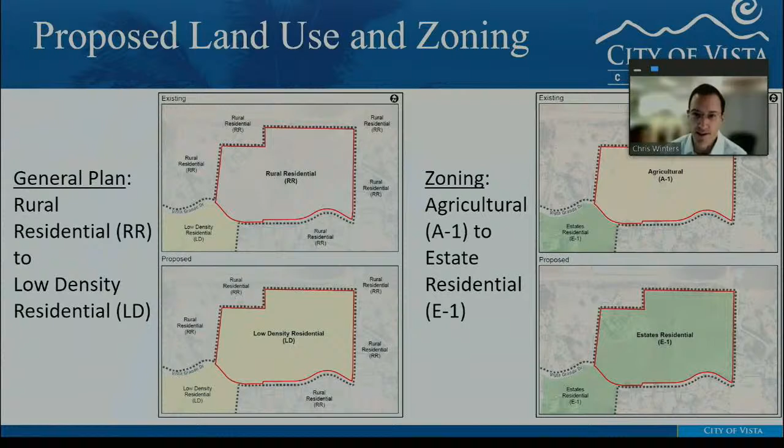Next slide, please. This slide shows the proposed land use and zoning. On the left-hand side is the existing general plan of rural residential, proposed for a change to low-density residential. On the right-hand side, we have the existing zoning designation of A1, proposed to be changed to E1, estate residential. Next slide.

Project history. The project site consists of 17 acres. It was annexed into the city in 2017 with a zone change to A1 zone for 14 lots, minimum 1 acre in size. On January 12, 2021, the City Council discussed a preliminary proposal from the applicant to allow for an increase in density to 2 dwelling units an acre for a 28 lot subdivision.

On December 7th, 2021, Planning Commission held a public hearing for the request to amend the general plan land use designation from rural residential to low density residential, and to change the zoning from A1 to E1 estate zone for the 28 lot subdivision with minimum half acre lots.

Items discussed by the commission at that time included lot size compatibility with nearby properties, the lack of on-street parking stalls, what the height of the new homes would be, whether 1 story or 2 story, gating of the road connection to Vista Grande Terrace, and landscaping and maintenance. The item was continued to an undetermined date. Next slide.

Project details as revised. Just a quick summary: based on feedback from the Planning Commission, the following changes have been made to the project by the applicant. The project has been decreased from 28 to 25 residential lots. Lots 6 through 11 were enlarged to 3/4 of an acre.

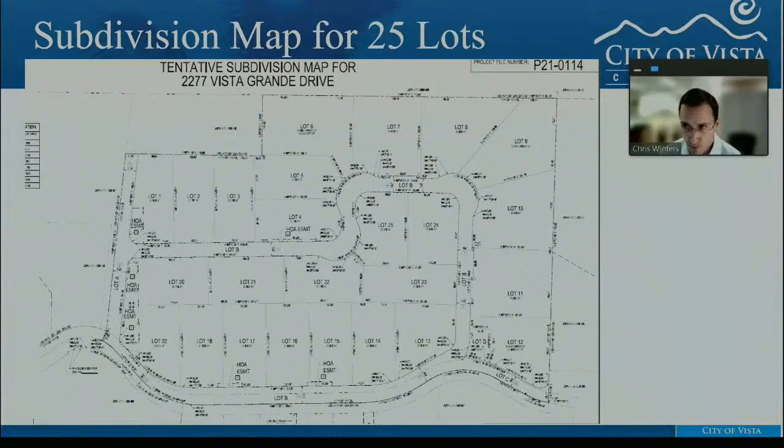This is the tentative subdivision map as revised, showing the larger lots on the north and east sides of the project boundary. It's a little bit hard to see on this slide, but the applicant has one that will highlight the on-street, street side parking spaces that are adjacent to a few of the lots distributed throughout the site. Next slide, please.

We do have revised conditions of approval that were sent to the planning commissioners by email, and we were just working on this today, so you might not have seen it. But to go over that, we've revised conditions for clarification purposes.

The first one, under the land development engineering conditions, states that the road connection from the eastern end of Vista Grande Drive to Vista Grande Terrace shall be gated to provide for required secondary emergency access only, and a corresponding note shall be shown on the final map.

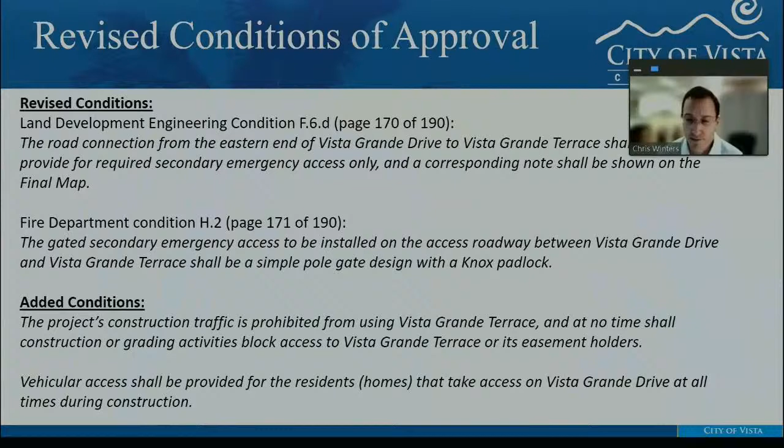Under the fire department conditions, one condition was revised to state the gated secondary emergency access to be installed on the access roadway between Vista Grande Drive and Vista Grande Terrace shall be a simple pole gate design with a Knox padlock. Added conditions include: the project's construction traffic is prohibited from using Vista Grande Terrace, and at no time shall construction or grading activities block access to Vista Grande Terrace or its easement holders. Also, vehicular access shall be provided for the residents that take access on Vista Grande Drive at all times during construction.

Under environmental review, a mitigated negative declaration was prepared. That was circulated for public review from October 2nd through November 1, 2021. The amended project does not include any new potentially significant environmental impacts, or increase any previously analyzed potentially significant environmental impacts that would require further mitigation than already required by the mitigation monitoring and reporting program. Pursuant to the California Code of Regulations, recirculation of the negative declaration is not required.

Staff's recommendation is for adoption of a resolution recommending City Council approval of the MND and mitigation monitoring and reporting program for the Vista Grande subdivision project, and to adopt a resolution recommending City Council approval of the general plan amendment, zone change, and tentative subdivision map for the 25-lot subdivision located at 2277 Vista Grande Drive. That concludes staff's presentation. I'm available to answer any questions, and the applicant also has a presentation that will touch on more detailed responses to the commission's previous comments.

Thank you. Chairman Ressler, would you like for the applicant to go into his presentation this time, or do you want to ask questions of Chris? I think we'll hear from the applicant first and then ask questions of both of them.

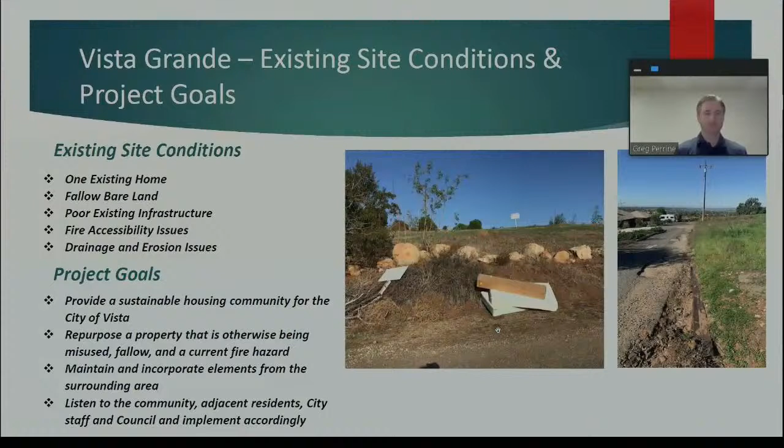So when we met on December 7th, we had a great dialogue with not only the commissioners, but also some of the surrounding residents who came up and spoke at the public forum. We identified a few key areas that we really wanted to focus on, go back, retool, and reassess to see if it's something we could accommodate with our development. I'll go over the three that we have here.

A couple of the other ones we felt were equally important were on the list: the existing roadway on Vista Grande Drive. I think Commissioner Rossler had mentioned why we didn't move forward with that road being public. When we started the design and further confirmed with the city after our meeting on December 7th, the city has no intent nor ability to own and maintain that road. We spoke to them very early in that process, and they had a preference that we make it private so it would ultimately be owned and maintained by the HOA. That's how we ultimately continued to pursue that option.

The second one, not really noted here, is something Commissioner Aguilera had brought up regarding SB9, the new legislation that allows you to separate lots and maybe add additional lots. Since our meeting on December 7th, we went back, did our own research, and spoke with some individuals. We were able to define with a bit more clarity what SB9 is for and how it may or may not apply to our development. Most notably, we have a letter from Senator Toni Atkins from August 2021 clarifying that properties or new developments with an HOA are exempt, and they override the rules and regulations of SB9. So we have the ability within our CC&Rs to prohibit subdividing those particular lots, and we would likely do that to ensure the integrity and the elements we want to protect in this area.

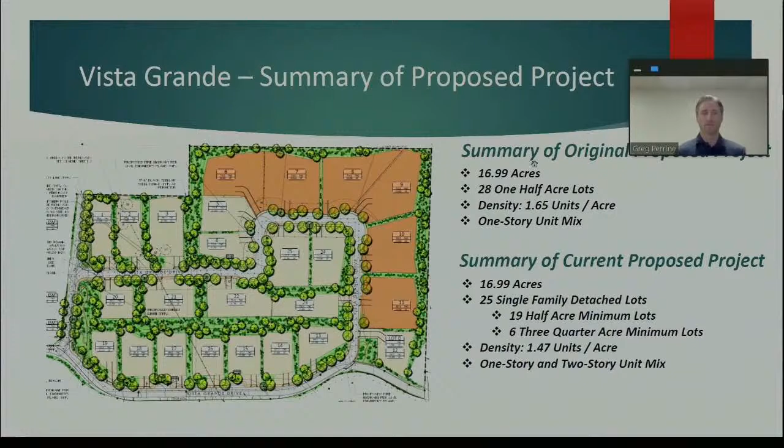Chris touched on this a bit, so for further clarity—and apologies for some redundancy—per the city code, based on what we're proposing for the 25 single-family detached lots, we have an obligation to provide 50 enclosed parking stalls and another 62.5 open guest parking spaces, for a total of about 112.

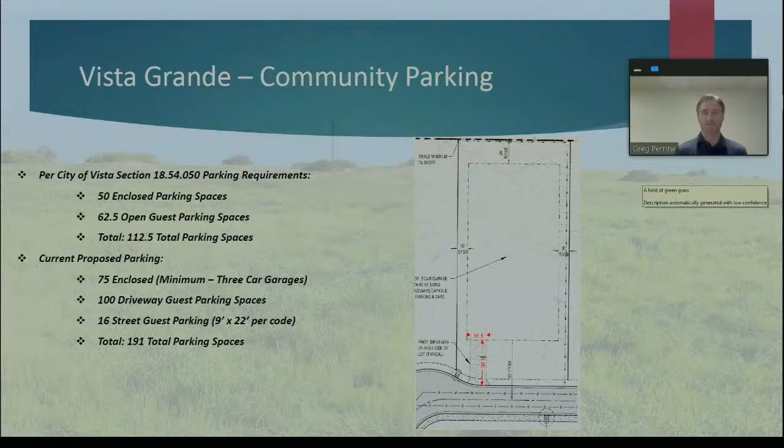Then with the driveway, allowing 4 spaces per lot, that gets us to another 100. We went through this configuration after listening to the commissioners at the December 7th meeting, who said they wanted to see additional parking on the street. We took that to heart, went through the city standards, and worked with our consultant team to put together additional street parking throughout the development to better accommodate guests as they arrive.

This illustration continues from the last slide and shows the areas where we've added additional parking. You can see the highlighted yellow areas—those are spots we carved out, call them pop-outs, for guest parking spots. We have 16 throughout the development. Right now they're shown with a pretty rough edge; as we get into final engineering, we'll refine the roundabout shape to get in and out of these stalls for better functionality and ingress/egress. Nevertheless, this illustration shows we took your comments on parking to heart, and rather than isolating it to one area, we did our best to allocate it across the entire development.

So in conjunction with the enclosed parking with the 3-car garage minimums, the driveway parking, and the on-site guest street parking, we're at a total of about 191 parking spaces, which is well in excess of the required 112.5. We feel that with this new parking reconfiguration, specifically the street parking, we're adequately parked, and in the appropriate places.

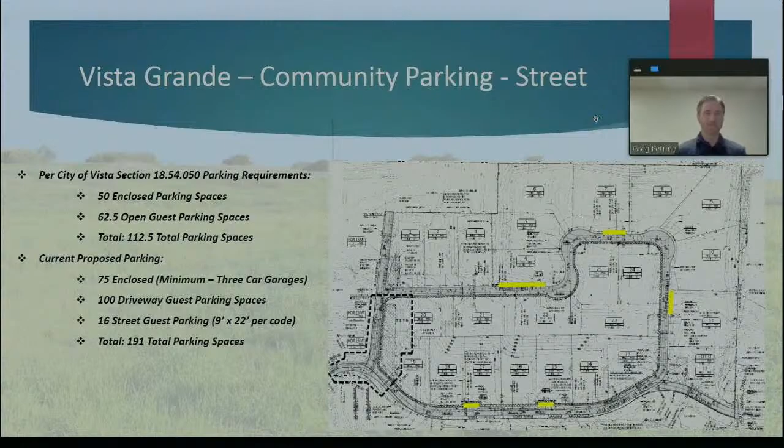The other element we discussed is privacy along the eastern property line. What we've done here, shown in the exhibit to the right, is an illustration of what we tried to accomplish with those lots. For context, the lot at the upper right is the northeastmost lot, lot number 9. For illustrative purposes, we dropped in a general footprint of what the house might be, and set the context based on the code requirements for what we're proposing—a 50-foot setback from centerline, a 10-foot side yard setback, and a 20-foot rear yard setback.

So what I wanted to highlight and illustrate here, it's kind of hard to see on the actual screen, but you can see the orange box there on lot 9. That shows the minimum setback of 50 feet from the center line. We wanted to show what that distance looked like from that point to our property line along the eastern and northern property line.

For that given lot, we did a couple of measurements. The first one is upwards of 190 feet. So if we were to build a home footprint, currently shown for illustrative purposes as 60 by 60, a 3,600 square foot footprint, there's anywhere from 120 to 190 feet from the back of that house to the edge of the property line.

Our goal here is to show that privacy is adhered to and respected. I think there's a significant distance from the rear of the house to those property lines. Again, these are just for illustrative purposes as we move forward with final plotting and final engineering. It's something we'll go back and refine. But these are significantly large lots.

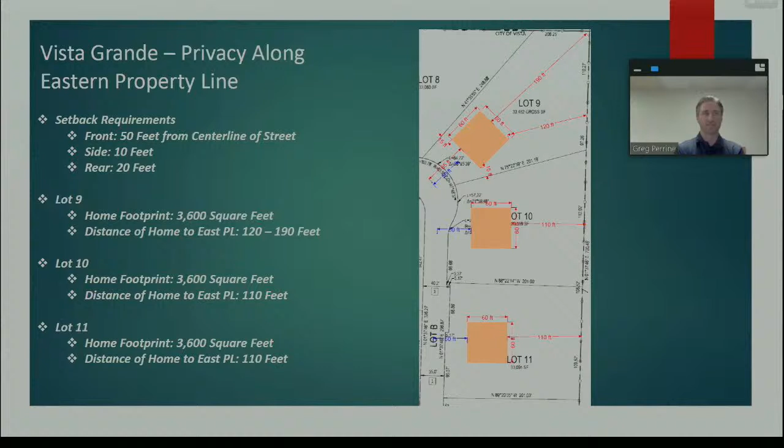Some of these lots have depths of 220 to 230 feet. And as you make your way south from lot 9, with lot 10 and lot 11, you'll still see that consistency of over 100 feet distant from the back of our house to the east property line. So privacy, we understood it, we respected it. And with these larger lots, I think it really adheres to the genesis of what we were trying to accomplish.

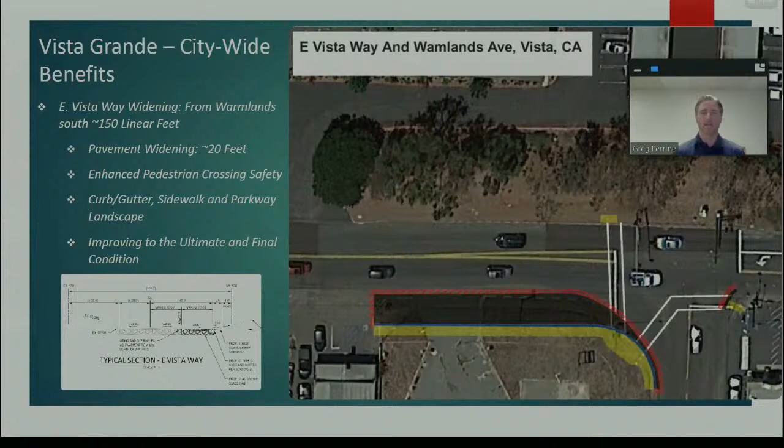In dealing with city council members, it was very important for them to at least provide some continuity from a pedestrian standpoint, and we felt an obligation to do what we could. This improvement is permanent. Once it's built, it's not an interim condition - we're building it to its ultimate right of way, something that will stay there in longevity and in perpetuity. We're very proud of this commitment. Again, this wasn't warranted by our traffic study, but we felt it was a way to be balanced and provide for the overall community, so it's something we're willing to commit the project to doing.

Next slide, please. To summarize, we're currently proposing a 25 large-lot residential community. After our meeting on December 7th, we went back and put pen to paper, working with our consultant team and city staff to address the comments that were provided - mainly the transitional layout from the lot standpoint, the parking requirement, and some of the privacy concerns.

So we feel what we've provided is a balanced project that is consistent with some of the feedback we received on December 7th. We also feel very proud of the enhanced adjacent and regional infrastructure we had talked about before. The project is going to meet all the different compliance from a sustainable standpoint. The home materials will be the highest quality, and all the homes will be fire sprinkled. The enhanced infrastructure for water purposes for firefighting will be greatly enhanced, as we're going to put in a loop water system way further north than where the current water exists today. We really think it opens up that whole region, not only for us, but for some of our neighbors to the east, for better fire protection and fire serving.

Next slide, please. So again, I want to thank you guys very much for the time and the opportunity to come and represent. I hope we've addressed some of the concerns we talked about on December 7th. I look forward to your comments and feedback, and again, thank you very much for your time and consideration.

Okay, thank you, Greg. Commissioners will open it up now to questions for staff or the applicant. Commissioner Grimm, do you have any questions? I don't have any questions at this time. All right, Commissioner Aguilar?

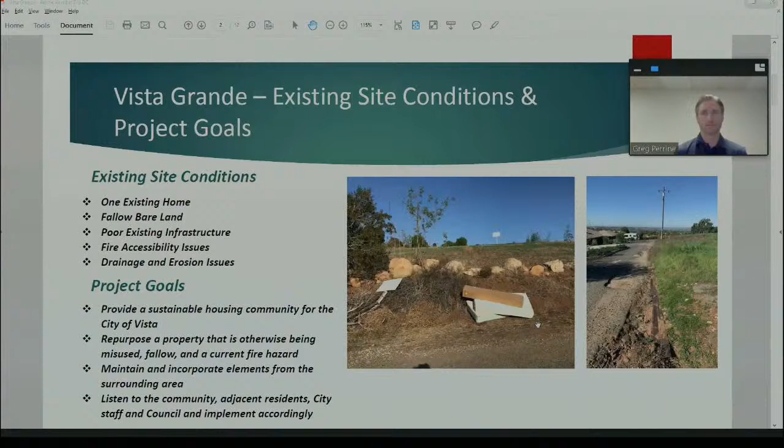As far as the plantings you show in your landscape plan, what are we looking at? What size trees are you bringing in? It's still to be determined at a certain point. We do have a mix of 5 gallon, 15 gallon, and 24-inch box trees on the street. It depends on the location, but most of the slopes will have significant 15-gallon trees, and mainly on the street parking or along the street we'll have 24-inch box trees.

How about on the east and northeast area, adjacent to the neighbors? Yes, sure. No, absolutely, that will be the slope, correct. I think it's going to be a palette that'll be further defined as we get to final engineering, but again we are going to be putting in the appropriate plant palette with appropriate sizes.

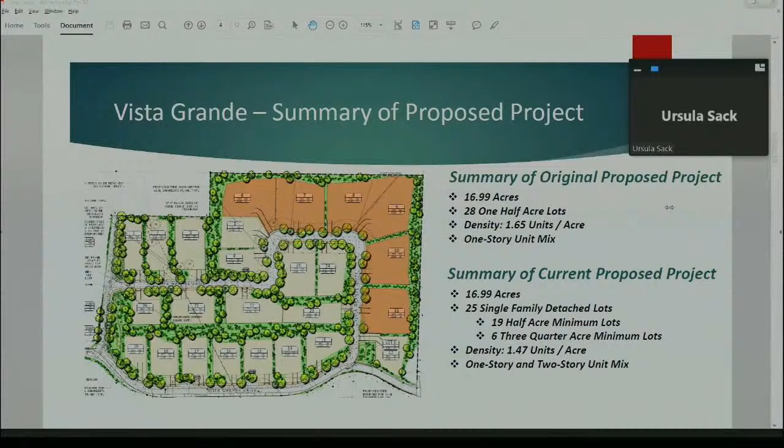We ask that you thoroughly discuss the general plan amendment at this meeting. We got it, thank you.

Mr. Winters, going back to the daylight sewage, do we have an answer to that question? Thank you, Chairman Ressler. I'm not sure if the applicant's engineer is available to speak, but I'll go ahead and read from a response provided to them that was included in the project's responses to comments in the MND. The project engineer, PLSA, confirmed that the grading plans considered the existing leach lines that occur along the eastern boundary of the project site. The cut slope along the tract boundary accounts for the required codes and regulations for a 5-to-1 setback for cut grading adjacent to an existing leach line system from an adjacent property owner. The project has been designed to comply with the required setbacks for dispersal fields.

Very good, thank you. Okay, Ms. Chow, who's next? I don't see additional hands raised, so I would ask if you are here to speak on the Vista Grande project, please raise your hand so I can recognize you. Alisa Willis-Davis, you already spoke, so we are only allowing new speakers at this time, please.

Hayden Davis, go ahead, hold on. Go ahead Davis, if you can unmute yourself. Go ahead. Hayden, go ahead, you can go ahead and speak. I believe you are unmuted right now. Yeah, for some reason we're not hearing the audio here, Chairman Ressler. There might be an issue at their end. Oh, here we go, go ahead Davis. Hayden Davis. Nope, yeah, there seems to be some difficulty. It's unmuted, but we're not able to hear the commenter at this time.

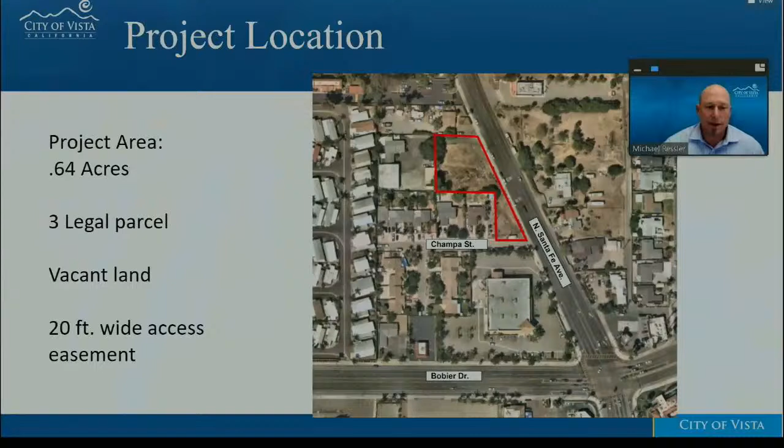Ressler explained the project before the commission is a site development plan for the proposed North Santa Fe Plaza apartment project, application number P19-0404. The subject site is located on the west side of North Santa Fe Avenue, north of Bobier Drive, covering 0.64 acres across 3 legal parcels, currently vacant land. The northern portion maintains a 20-foot wide access easement providing access from North Santa Fe to the neighboring property to the west.

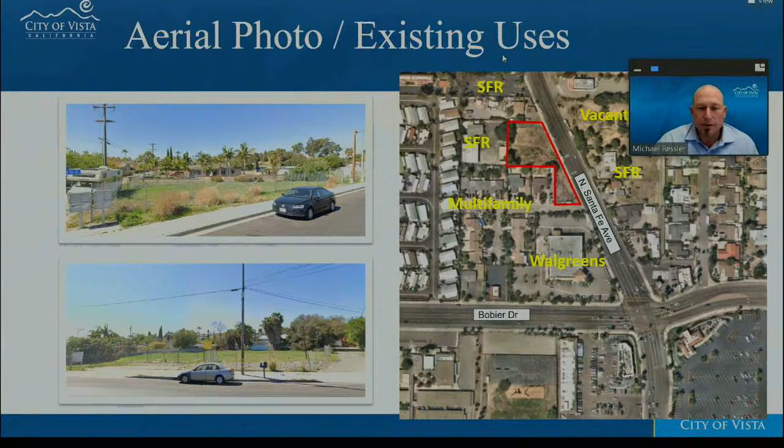Here's an aerial photograph of the site. Surrounding land uses include a single-family home to the north, single-family and multifamily residential development to the west, Walgreens to the south, and single-family homes and vacant land to the east across North Santa Fe Avenue.

The general plan land use designation for the site is mixed use MU, with the corresponding zoning of mixed use MU 40 with the North Santa Fe overlay, which allows for mixed use and multifamily residential development with a maximum density of 40 dwelling units per acre.

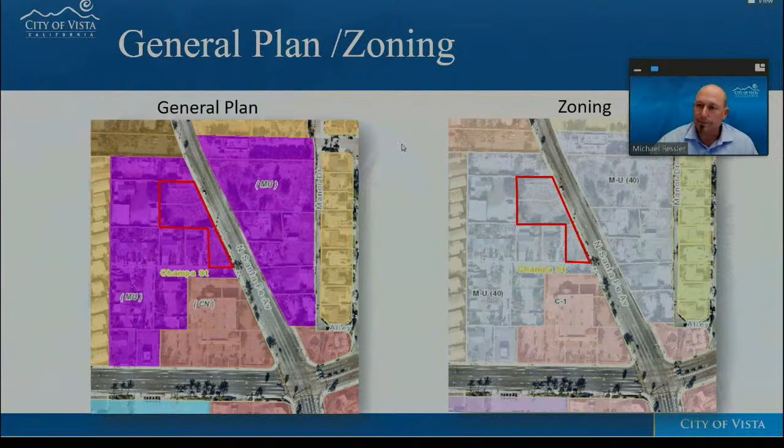The North Santa Fe Plaza apartment project includes a request for a site development plan to develop 21 apartment units on 0.64 acres, which equates to 33 dwelling units per acre. The project also includes a 746 square foot single-story coffee shop. Site improvements include open space, parking, drainage improvements, wet and dry utilities, as well as other infrastructure improvements.

Recreation amenities within the proposed development would include a gym, seating areas, playground, and turf. This project does include 2 very low income affordable units. In return, the project would utilize a state parking requirement for the number of on-site parking spaces required and qualify for 1 development concession per the state density bonus law.

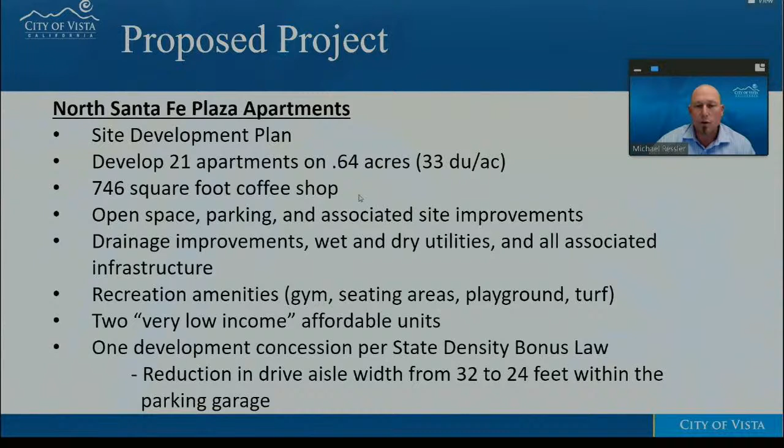The applicant is requesting a reduction in the drive aisle width from 32 feet to 24 feet within the proposed parking garage.

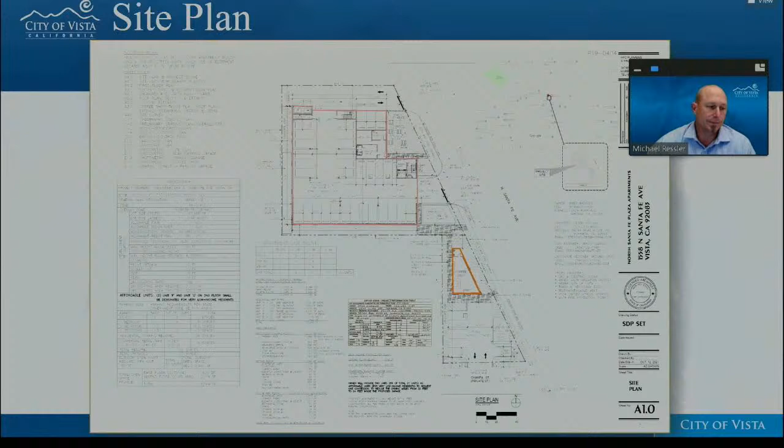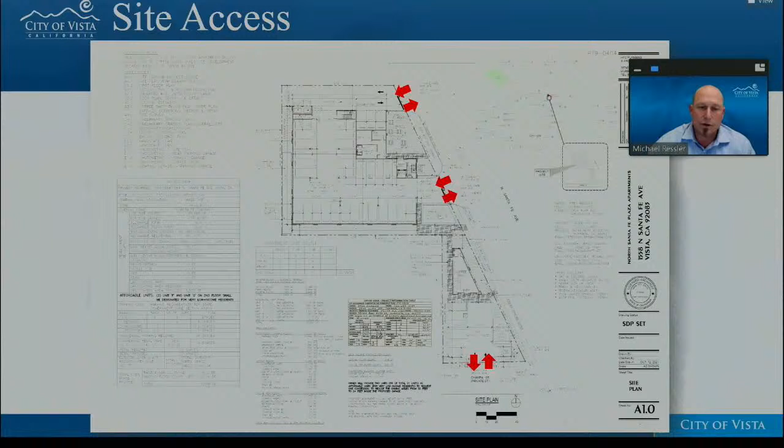The submitted site plan depicts a 4-story apartment building on the northern portion of the site, as well as a 746 square foot 1-story coffee shop on the southern portion of the site. Access to the site would be provided by 2 24-foot wide driveways along North Santa Fe Avenue, as well as 1 24-foot driveway along Champa Street.

In regards to parking, the Vista Development Code requires 5 spaces per 1,000 square feet of gross floor area for the coffee shop. The state density bonus law requires 1 parking space for 1-bedroom units and 1.5 parking spaces for 2 and 3-bedroom units. Based on the proposed count, the project would require a total of 32 parking spaces, and the submitted site plan indicates a total of 37 parking spaces would be provided.

As I mentioned before, the applicant is requesting a concession to reduce the drive aisle width within the parking garage from 32 feet to 24 feet.

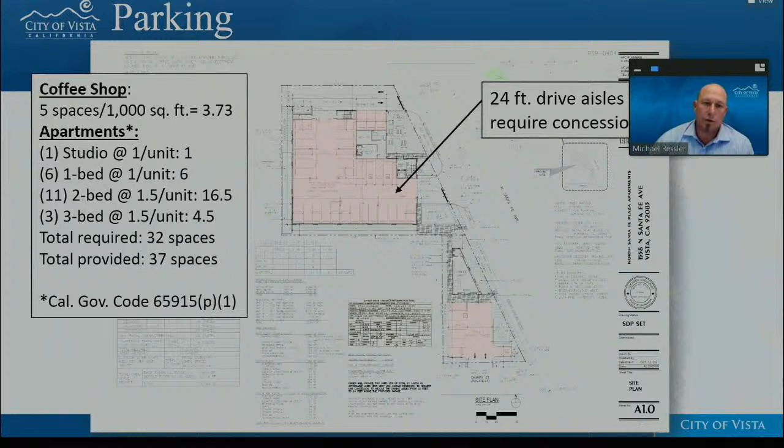In regards to landscaping, the site has been designed to dedicate 23% of the site to landscaping, which exceeds the code requirement of 10%. The landscape plan proposes the use of native and non-native plant materials.

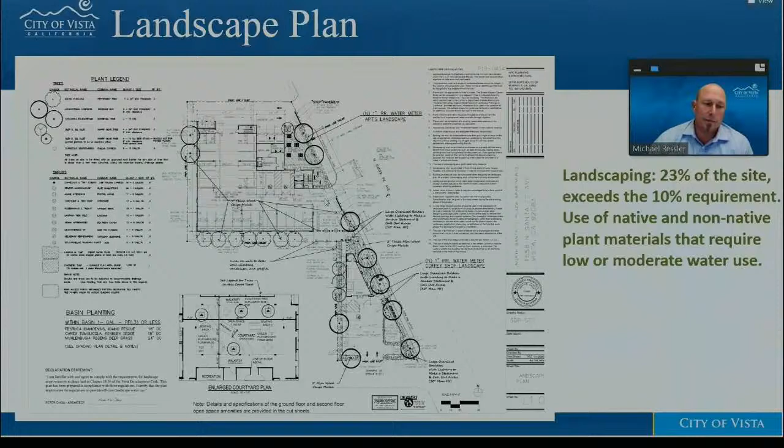Site amenities include a turf and seating area on the ground floor. And on the second story, it would feature a courtyard featuring a seating area, play equipment, as well as a gym.

The proposed apartment building would be 4 stories, maximum height of 54 foot 4 inches. The architectural design of the building reflects a modern Mediterranean architectural style. The building would feature hip, gable, and slope roofs and stucco exteriors. The building elevations are enhanced with features that include arch recess elements, stone veneer awnings, as well as metal railings. When completed, the apartment building would maintain a tan and white color scheme.

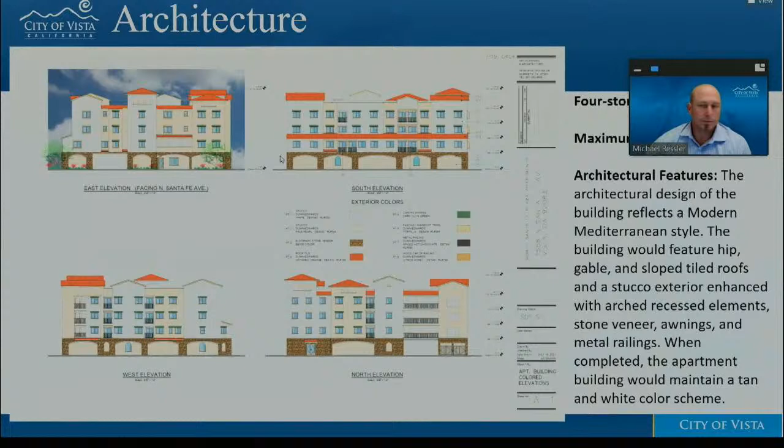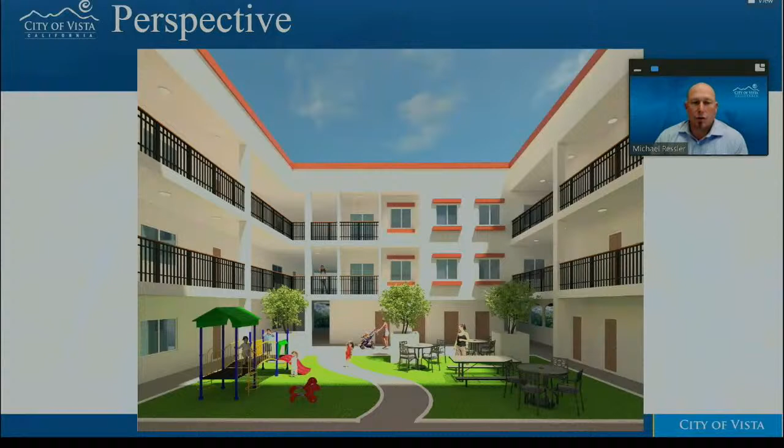The proposed 746 square foot 1-story coffee shop has been designed to maintain a service counter, display shelves, as well as restroom facilities. The exterior of the building has been designed to complement the proposed apartment building with similar finishes and color scheme.

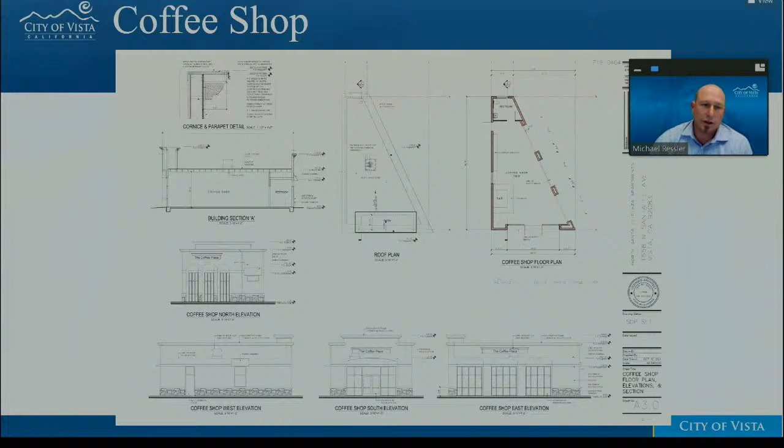The general plan land use designation for the site is mixed use with a maximum density of 40 dwelling units per acre. The proposed project includes 21 units on 0.64 acres, which equates to 33 dwelling units per acre. In regards to the MU 40 North Santa Fe overlay development standards, the project has been designed to comply with those standards. In regards to building height, the maximum height within that zone is 60 feet. The proposed project would reach a maximum height of 54 foot 4 inches.

In regards to parking, the required parking would be 32 parking spaces utilizing the state density bonus law parking requirements. The site plan has been designed to provide a total of 37 parking spaces. In regards to open space, code requires 2,940 square feet. The plan indicates 3,799 square feet would be provided. And in regards to landscaping, 10% of the lot is required to be landscaped pursuant to the zoning ordinance. The submitted site plan indicates 23% would be provided.

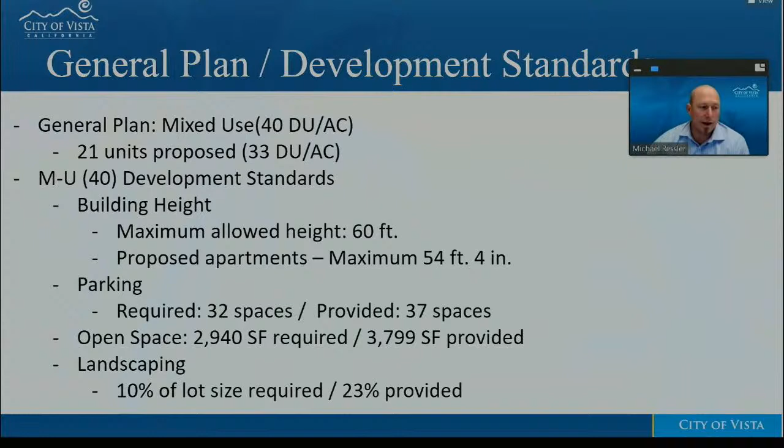Patsy, it doesn't look as though the whole entire slide's coming up. Oh, there we go. There you go. There's an animation, Michael.

First, building massing and architectural continuity. The applicant has revised the proposed apartment building elevations to reflect a more cohesive architectural style. In order to confirm the architectural continuity, staff retained the services of NW Steel Group, a reputable San Diego architectural firm, to perform a peer review of the revised design. At the conclusion of that review, NW Steel Group confirmed that the plans were accurate and represent a consistent architectural theme.

Another concern of the Planning Commission was the unorthodox exterior color scheme. Since the previous design, the applicant has revised the color palette of the proposed building to reflect a more neutral color theme featuring tan and white colors, enhanced with a burnt orange cement tile roof and green canvas awnings.

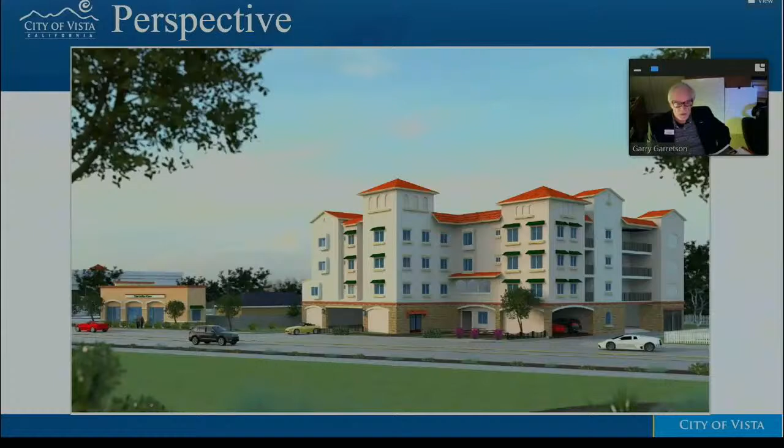Yeah, actually, the tower in the back—explain that to me. Yeah, those are just recessions on that wall in order to provide some type of an elevation break. So what that does is just break up the massing of that tower and provides a little bit of a relief along that elevation.

So it's not really a window, just to break up the surface there. That's correct, they're just recessed panels or archway. Yes, okay, that's what I thought. I wanted to confirm, thank you.

All right, Commissioner Hastings, questions of staff or the applicant? No questions. This has come a long way since the last time we saw it, and I think it looks a lot better, so I'm happy for that. I also like the layouts of the apartments inside. I know we don't necessarily look at that, but I like them. So that's it for me.

Okay, Commissioner Looney. Great improvements, Tony did—it looks like a different project. So you're to be commended on that. Two questions.

One's for staff, one's for the applicant. Michael, would both buildings need to be constructed, or could they build the apartments and then build the coffee shop at a later time, if that happens?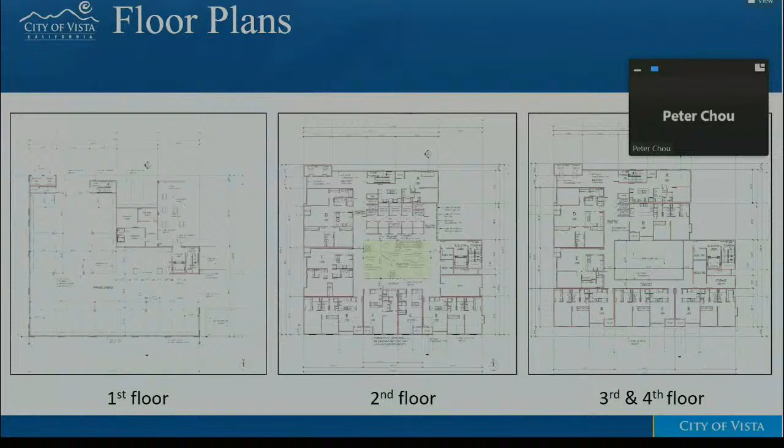Will they be locked and only the resident have a key to that door? Exactly, only the resident, the tenant, has the key to operate that door. Okay.

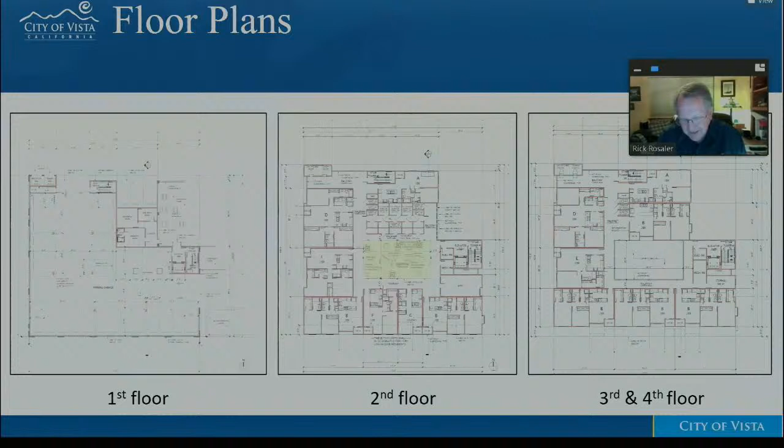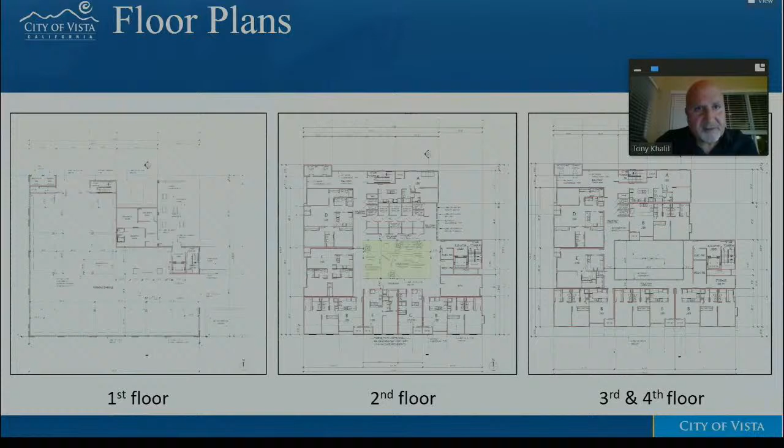All right, and then Mr. Colley, tell me what you're envisioning for the front yard of the unit where the picnic tables are. I thought that was... we have the City of Vista's landscape manual we're working with, and as mentioned, for landscaping, when 10% is required, we're providing over 23%, more than double what's minimally required.

Michael, are you more familiar with this type of landscaping? No, I don't think it's the landscaping Chairman Rosaler was referring to, I think it's the amenity within that area he's questioning. Is that correct, Chairman? Yes. Okay, what do we got? Peter, 5 picnic tables? I think you might want to address this one.

It's in regards to the programming of that space. When we design that ground floor open space, we want to create a leisure open space inviting to tenants, or potential tenants coming in to negotiate the contract, sign the lease - that will be the place to meet the managers. But at the same time, we know the City of Vista has some homeless and transient issues, so the owner has decided to have a full-time property manager who lives right next to the ground floor open space to maintain safety and security. The table and chairs are good for tenants and kids to have a leisure lunch and gathering. At the same time, that open space fronts the street to give a comfortable feeling for people walking along the sidewalk, with the building setback at least 30 feet away from the sidewalk.

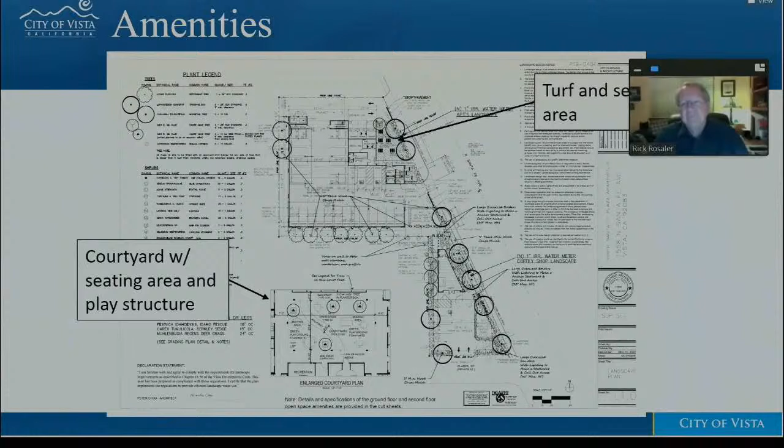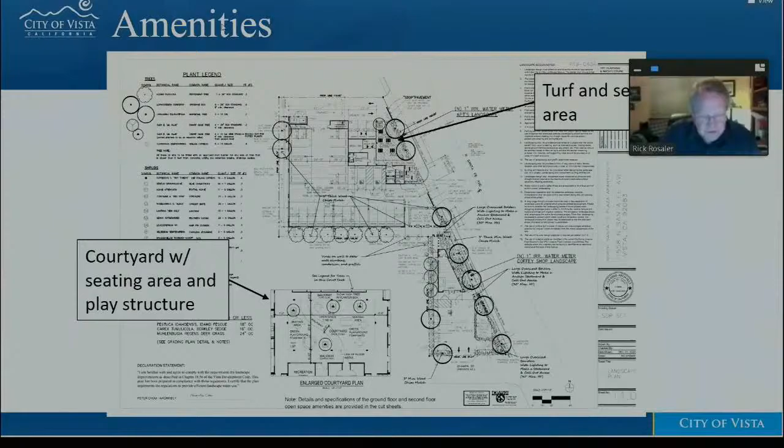Very good, congratulations Mr. Khalil, good luck. Thank you so much Commissioner, and Michael and Patsy for their great jobs. Moving on to our last public hearing, I'll give Patsy a moment to get set up. There we go, okay.

Mr. Conley, I believe the staff report is yours on the sign amendments to the Vista Development Code, signs on private property. Yes it is, Mr. Chairman, this should be quick. Next slide, Patsy. So we are seeking some clarification in a sign code amendment related to residential signs and temporary signs for elections. We've had some issues with interpretations of these code sections, and based on correspondence with the attorney's office, we brought forward an amendment. Development Code Chapter 1852 is what we use to regulate signs on private property, where these regulations would fall, and we're recommending amendments for clarity in these two areas of the sign code.

Next slide. Oops, was that? There's I think about 4 other slides. Oh, hold on, I went the other way. Sorry John, okay, I'm using the roller, I went up instead of down, sorry.